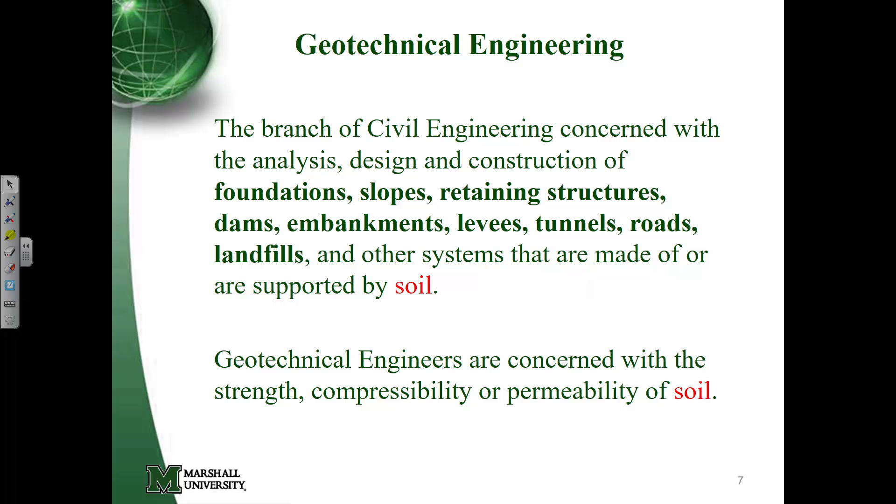I'm going to put heavy loads like tanks on the ground surface. That can cause it to settle up to 2 feet, and no one wants their tank or a building settling 2 feet. So we look at the strength, the slope stability, or how big the foundation needs to be for the building so it doesn't settle or have cracking issues and things of that nature.

And you can see the impact you made on people. That's what engineering is, it's about helping people out and solving problems. If you don't like solving problems, you need to find a different field, because the only time they call an engineer is when they have a problem. If they can figure it out themselves, they don't need you. So it's about solving problems, about accepting people's problems.

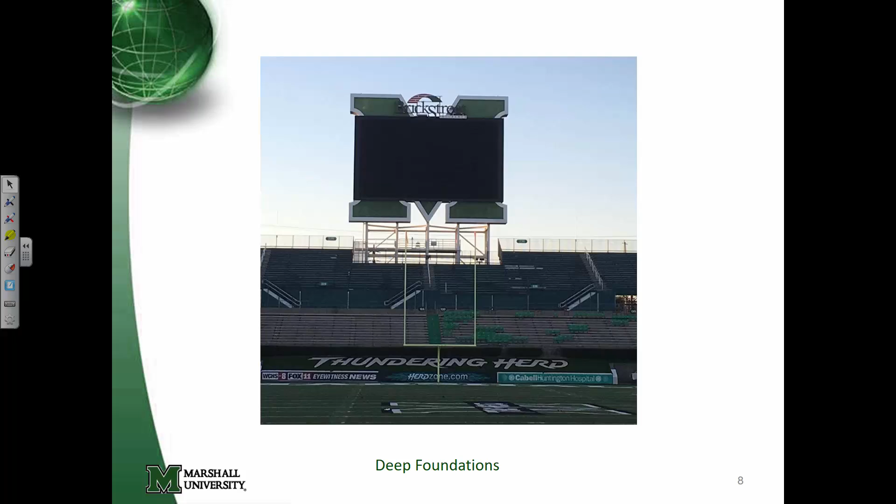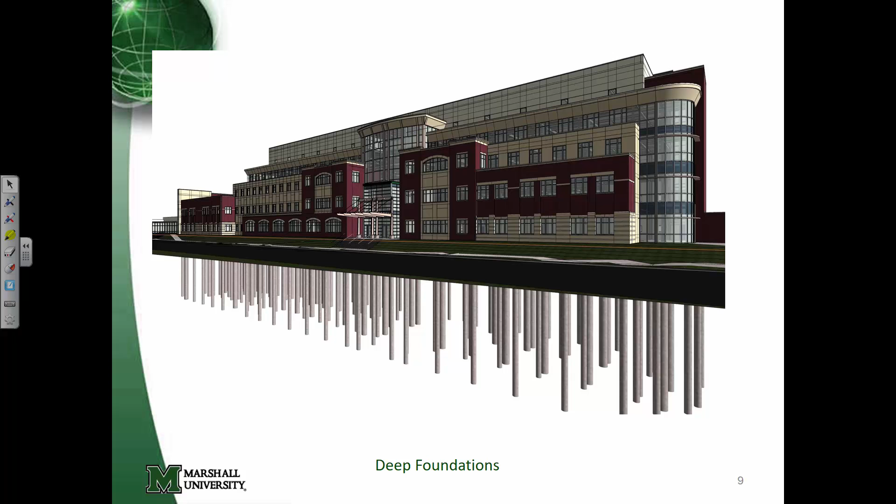If we didn't do that, that building would probably settle about 9 inches. So instead of stepping up into the building, you'd be stepping down into it. Nobody wants to do that, right? So that's a deep foundation system. That's the kind of thing geotechs design, how big and how deep those shafts need to be to support the building. Things I work on, I try to prevent these things from happening.

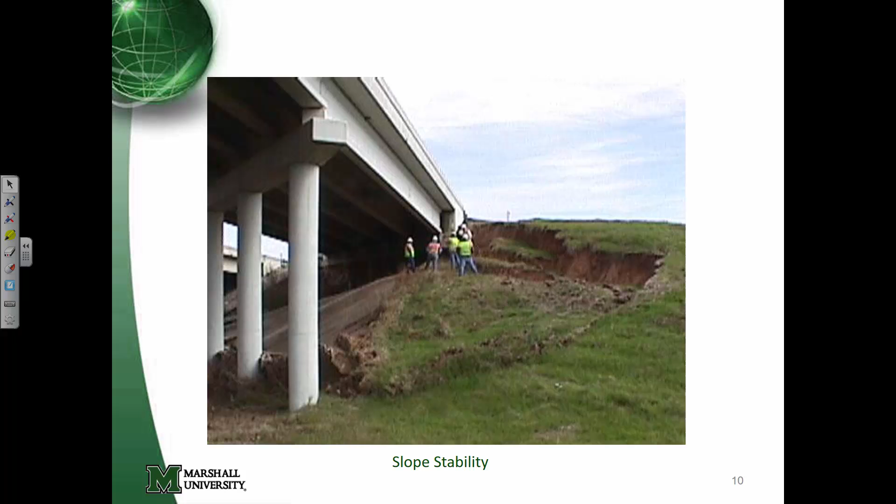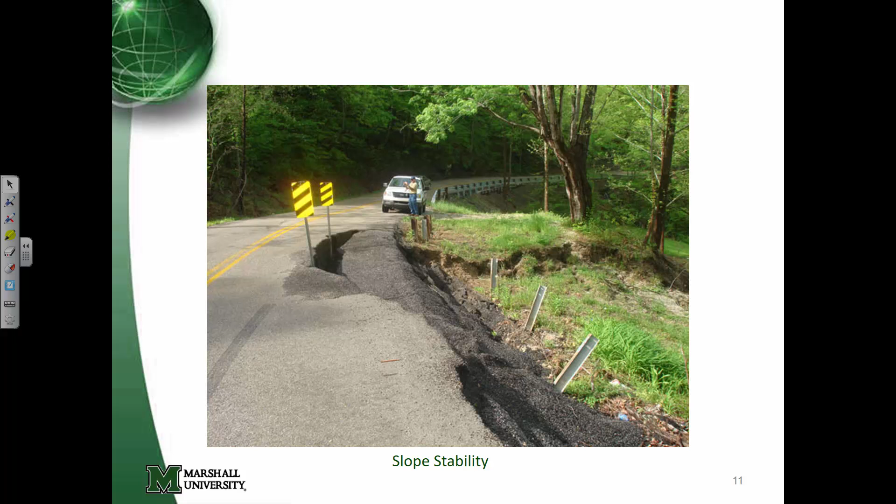I actually was supposed to have a drill rig sitting right there overnight. The drill rig was late getting there, thank heavens it was late, because $500,000 would have rolled down over the hill with the hillside. So major, of course it shuts the road down, a major inconvenience. It's somewhere around $200,000 to $250,000 to fix that when it's all said and done. So it can get expensive.

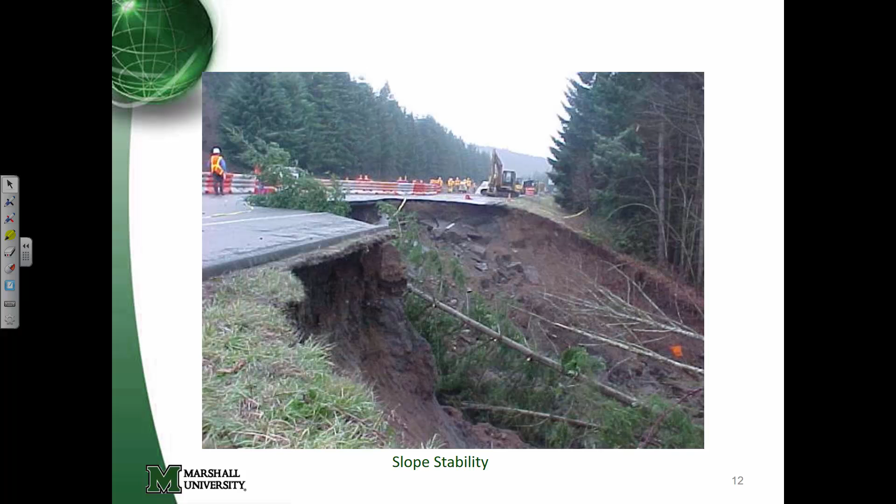I like to work on dams.

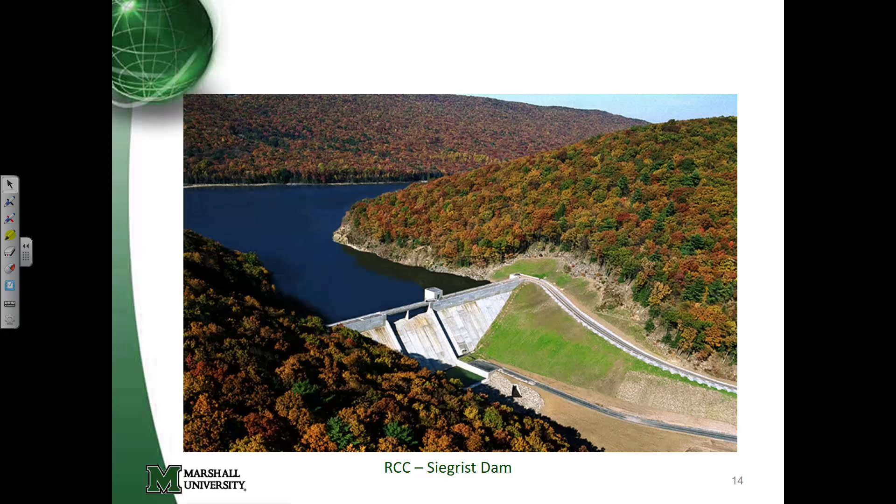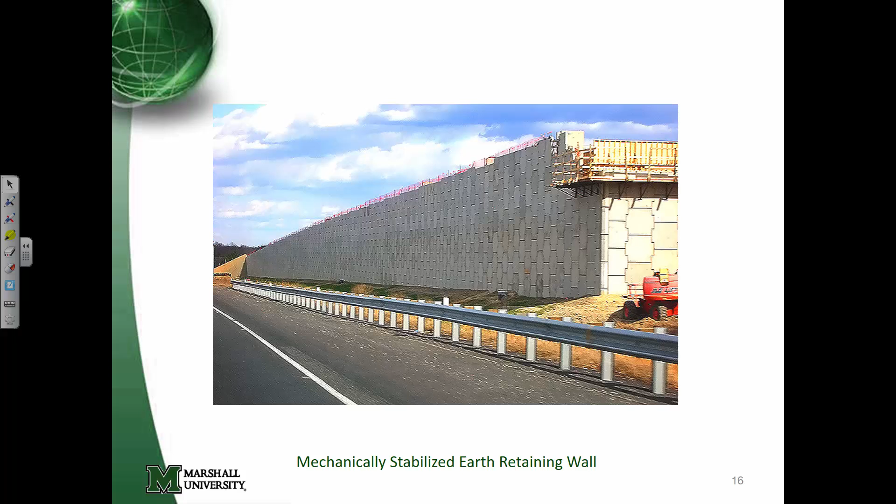That's a mechanically stabilized earth wall. There's soil inside there, and we know how to design that so that soil surface, that face, can be straight up and down and support all the loads that are on top of it.

Another example of a retaining wall, these are anchors. They go back in the ground about 100 feet, and all those anchors are required to help hold that up because that is quite a large height there.

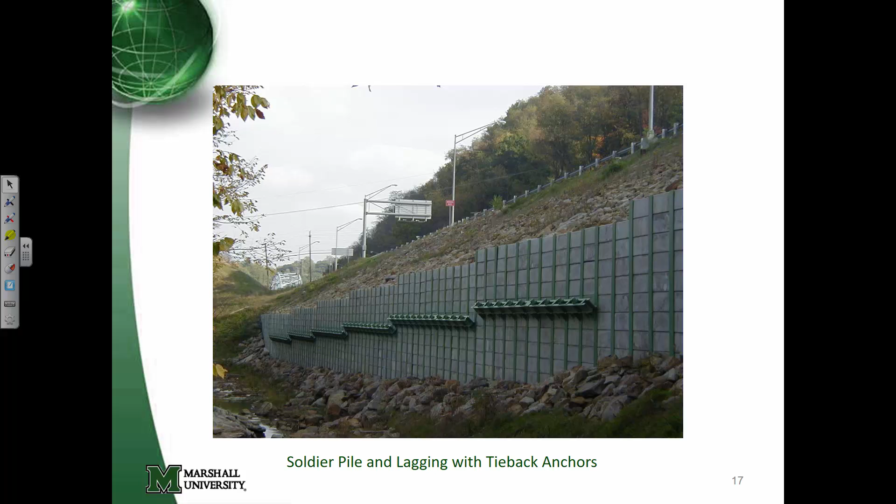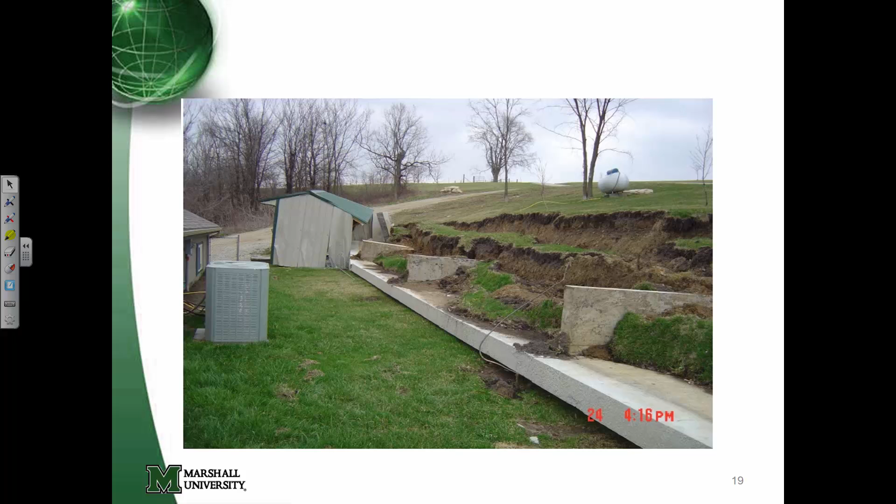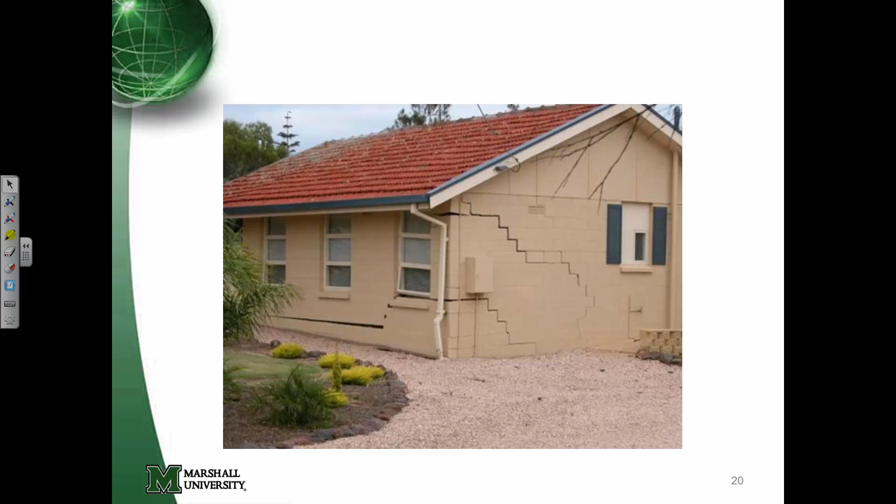Retaining walls. This is a poorly designed concrete wall that fell over in somebody's backyard. Of course, anybody starts wanting to sue each other, the contractor or the engineer, all that kind of good stuff. It's not always super catastrophic, but I still wouldn't want my house looking like that. That's the kind of stuff we can prevent, or if we don't know what we're doing, occurs.

We can have major events, liquefaction and things like that due to earthquakes. The soil underneath those buildings actually became liquefied, like quicksand. Some of them just settled straight into the ground, and a few of them laid over during the event.

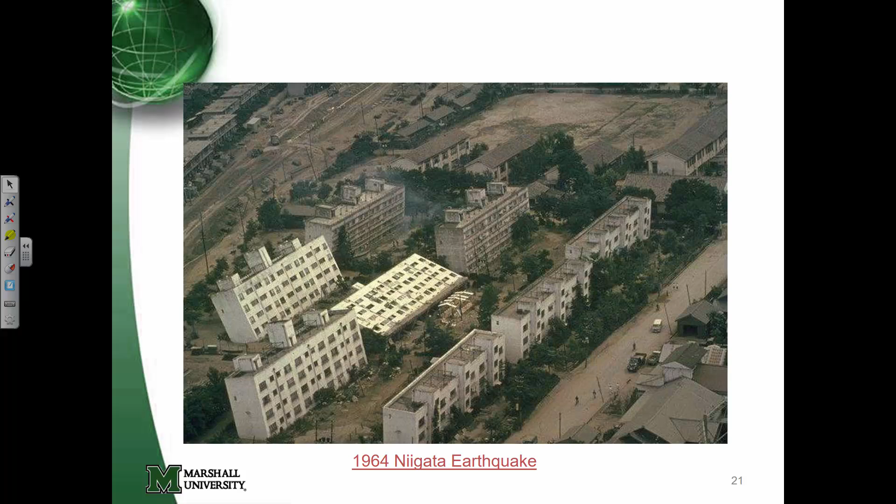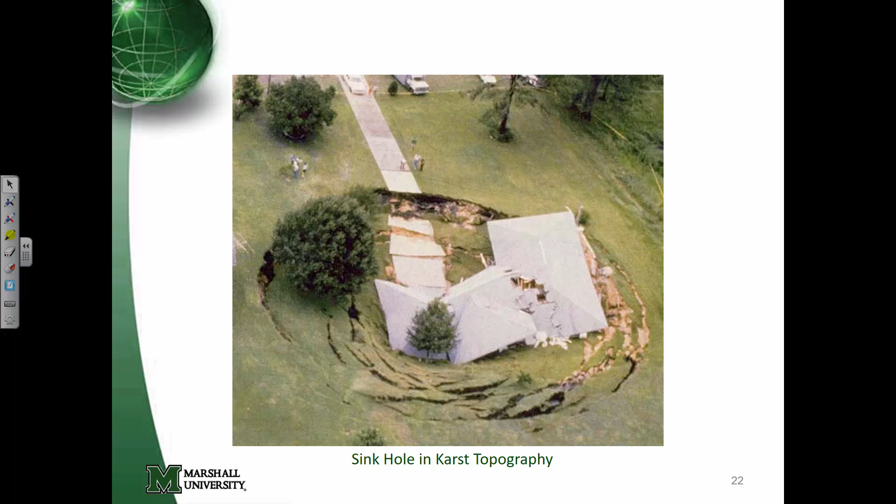Sinkholes. That's one heck of a way to come home at the end of the day, isn't it? That's a pretty good size hole. You've got to understand karst topography when you're building in it and know how to prepare a house so that doesn't happen to it.

That's Yeager, the Yeager landslide. If you looked at this, got a tape measure out, and stood down here and measured all the way up to the top, it's about 240 feet. Largest reinforced soil slope in the world. It's now the largest failure in the world. There'll never be another one built this big. The current next biggest one's 140 feet tall.

This was 240 feet tall when it was built, so they'll never build one that large again. Currently right now, all that material's gone down to about right here, and hopefully in about 2 weeks it'll all be gone.

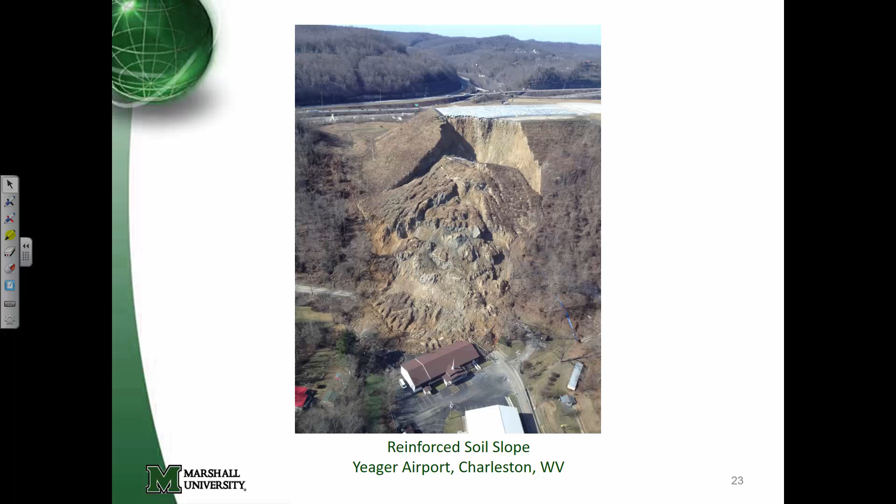More of a close-up shot. Here again, the scale is kind of hard to appreciate in these photos. That's about 150 feet right there, straight up and down. That's the end of the runway off the airport.

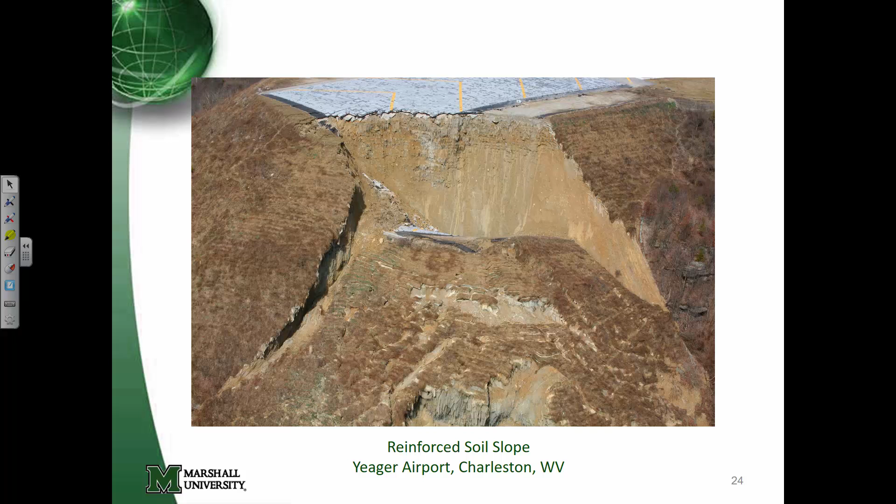Out there, I was the first person to walk on that. Six days later, out there walking, it was still moving. This material right in here, over the next year, ended up being about 150 feet down the hill because it kept failing over time and oozing down. We called it melting, essentially - it's kind of melting down the hillside.

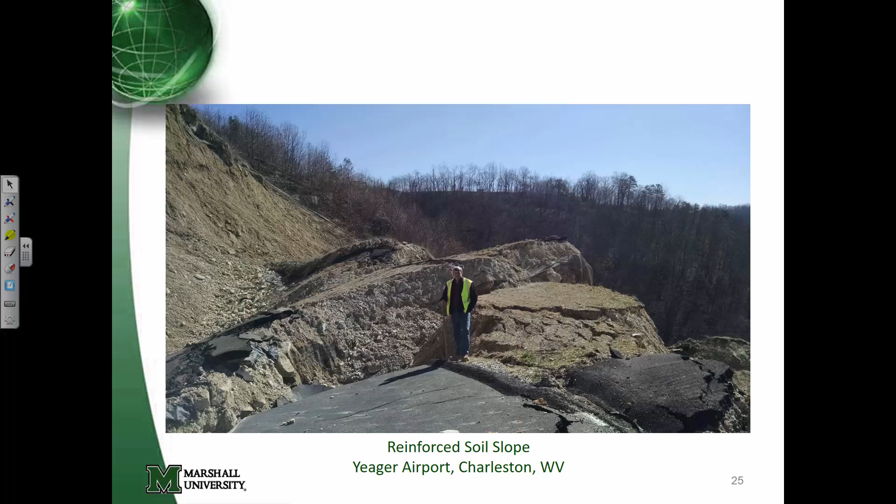So you can get involved in a lot of cool stuff in geotech, a lot of cool stuff from a failure standpoint, because when people don't know what they're doing, don't do it right, it causes problems.

So if one of your structures did fail, would you be sued? Typically, the entity that gets sued is the company you work for. Now, I'll feel guilty and bad, but you do not typically get sued personally for anything—it's the company that gets sued. If I did something very negligent, then yes, I can be personally held liable, but you've got to do something very incompetent. If you're a good engineer watching what you're doing, that won't be a problem. I don't personally know anybody that's ever been sued for negligence. I've been in this 29 years, and I don't know anybody that's been sued for negligence ever.

Good question. Anybody else? Yes, sir. On the slide with the karst topography, you mentioned it was up to geotechnical engineering to prevent that. Do you just study the soil and advise them not to build there, or is there something you can do to the house to prevent the accident?

It could be one or the other. We'll go in and drill holes in the ground. First, we have to have a knowledge of geology. There's no karst topography in our general region right here in West Virginia. Get over in Kentucky, you can get it. Of course, down south you get it a lot, in Florida and those type of environments. So we have to know the geology in the area—know, hey, I could have karst topography here.

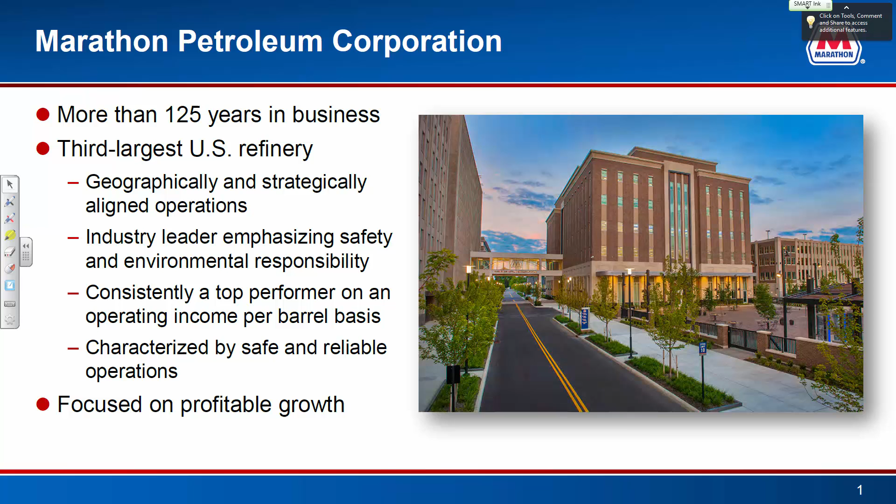We are, let's see here, a Fortune 50 company. Like I said, established in 1887, so we've been around a long time.

Largest in the Midwest. Everybody wants to know how much money do you make. Our revenues, before we take anything out for taxes and operating expenses, is $72.3 billion, which is a huge number. Our net income last year was $2.85 billion. So we made a lot of money, but we also paid $9.6 billion in taxes. As you can see, we paid 3 times the amount of taxes as we made in income. Everybody can gripe and moan and complain about gas prices, but we're not robbing you guys blind.

We have approximately 45,000, a little over, employees throughout the company. Our headquarters is in Findlay, Ohio, about 3.5 hours north and a little bit west of here.

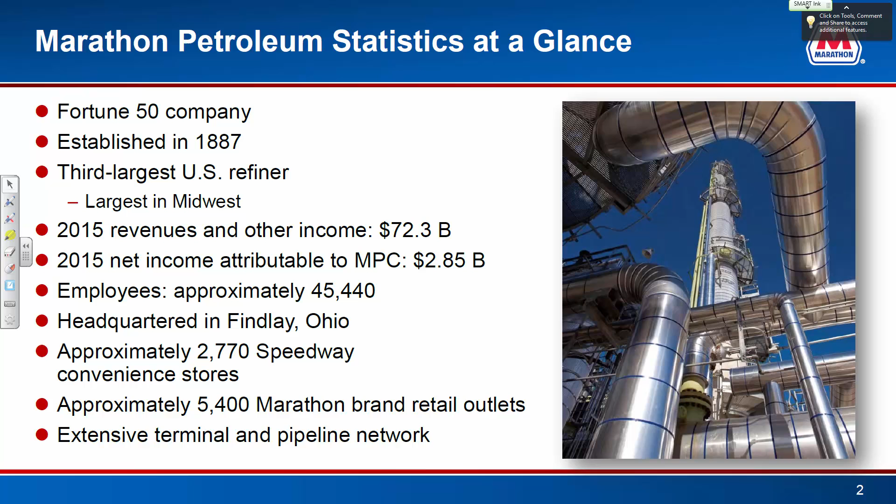2,770 Speedway locations. We just, in the past 2 years, bought the Wilco Hess franchise, adding to our station count, and there's 5,400 Marathon stations on the East Coast.

We were, at the beginning of this year, ranked as Forbes' best large employer, so that was a big honor for us. We didn't go out seeking that. I guess there were some online polls, and Forbes reaches out to all the different large corporations, does polls of its employees, and our employees nominated us, a larger portion than any other company, so we were ranked as the best large employer.

Like I said, I've been there 8 years, and it really is a good company to work for. Once the mechanical program here gets started, I've heard the rumor of the co-op program maybe getting started here too. That would be an excellent way for you guys to maybe end up working for us one day.

Another just kind of a corporate slide here: health and safety, environmental stewardship, integrity, corporate citizenship, and an inclusive culture. That's kind of the 5 pillars of our company.

This is a very busy slide, but it shows you where all the pipelines are that we own, either own or have an interest in. It's about 8,400 miles of crude and refined product pipelines, so that's a whole lot of pipeline in the ground. We have 7 refineries, and we'll talk about those here in a minute.

The closest one is right over here in Catlettsburg, where I'm based out of. We own 1 biodiesel plant in Cincinnati. I have not been there, that's the only plant I haven't been to, but it's pretty close. With the fuel efficiency standards and renewable fuel standards coming out, it just makes business sense for us to own both a biodiesel plant and have interest in several ethanol plants.

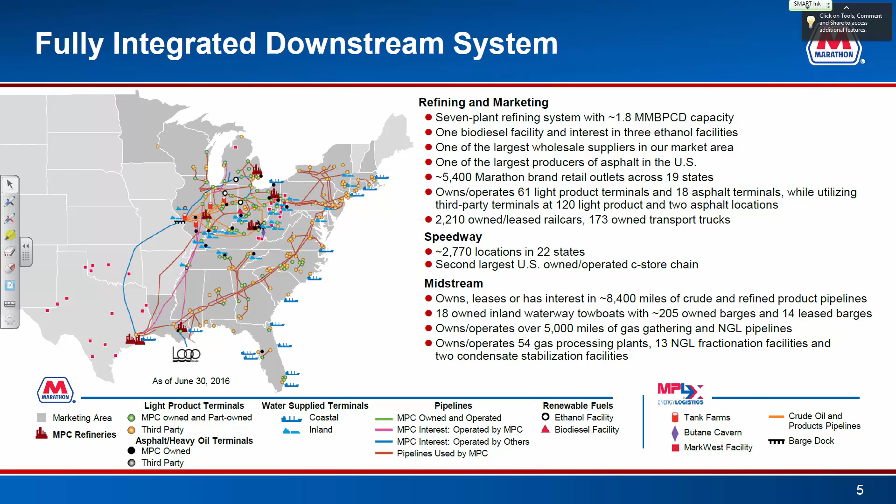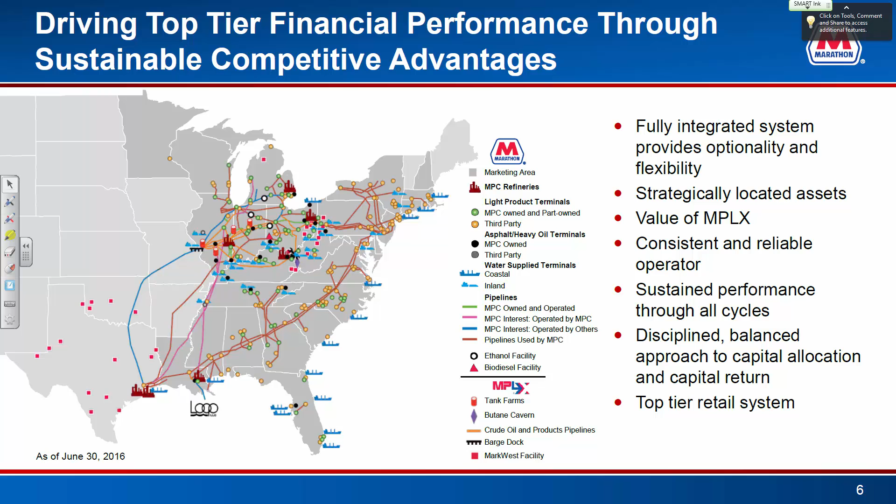Lots more information here, all basically the same. This shows our pipelines—the LOOP is down here in the Gulf. That's actually an offshore loading facility, so we can import crude from out of the country and get it into our refining network.

So what's it take? This slide basically tells you what we do with crude and what products we make. Our crude throughput is 1.7 million—M's and B's don't mean the same all the time, so it's 1.7 million barrels a day of crude going through our refining network. In a barrel of crude there's 42 gallons, so it's a bunch of gallons. We also buy 177,000 barrels a day of other feedstocks.

That gets to 1,919, and I did the math here—it doesn't quite make sense, but I have an explanation. When you add the 1,711 and the 177, you only get 1,888, but there's 31,000 barrels a day of what we call volumetric expansion. Whenever you boil the crude and crack the hydrocarbons apart, you actually get more out of a barrel of crude than what you put in.

We also purchase 412,000 barrels a day of other items off the market and resell it. At the end of the day, we have 35 billion gallons of sellable product that come through our refineries throughout the year.

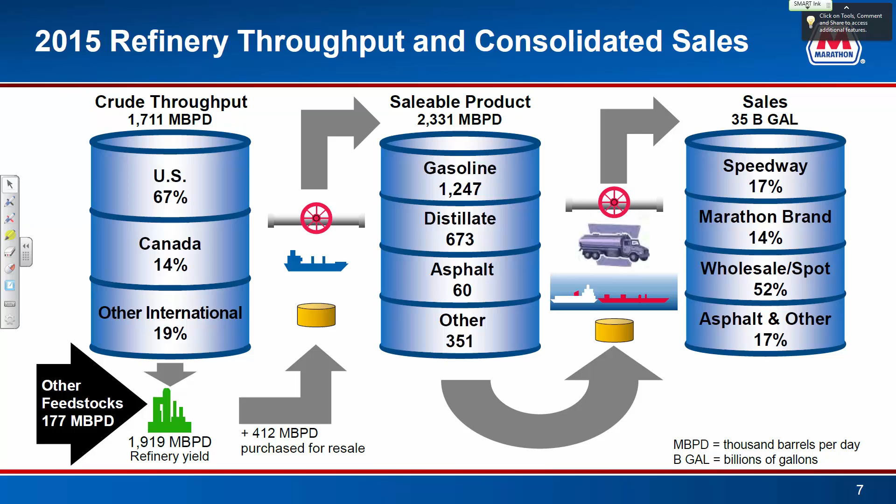Refining—like I said, we are the largest refiner east of the Mississippi. These are our 7 refinery systems. Garyville, Louisiana is kind of our mothership, the shining star—it's actually the newest refinery in the nation. Galveston Bay we purchased about 4 years ago from BP. Catlettsburg, where I work, runs 273,000 barrels a day. Then there's Robinson, Illinois, Detroit, Michigan, Canton, and Texas City.

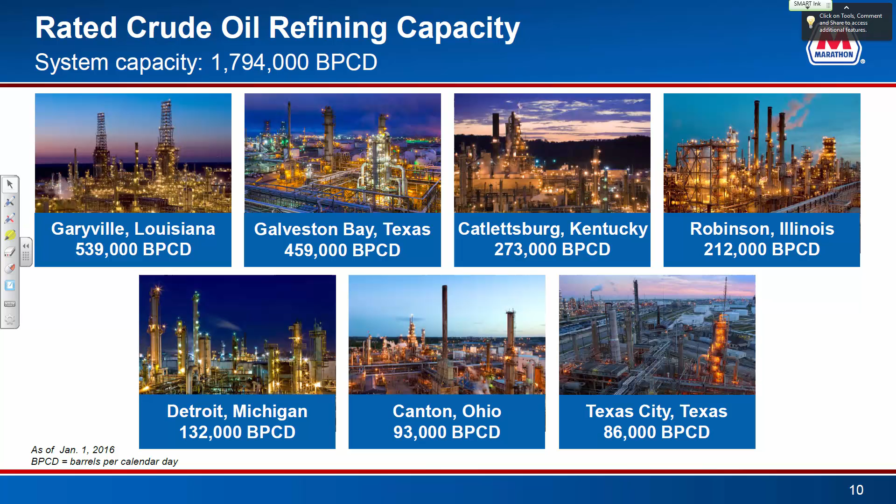We're actually undergoing a large major project at the Galveston Bay refinery. Texas City and Galveston Bay are actually right across the street from each other, so right now we're combining those two to operate them as one large refinery.

This shows the locations of where the refineries are. Catlettsburg—you can see, where's the pointer... Catlettsburg is just right across the street from us. Basically you drive west on I-64 and get to Kentucky, left and right-hand side of the road. There it is.

The only refinery I haven't been to is Detroit, and I just try to stay out of Detroit—it's a pretty rough neck of the woods.

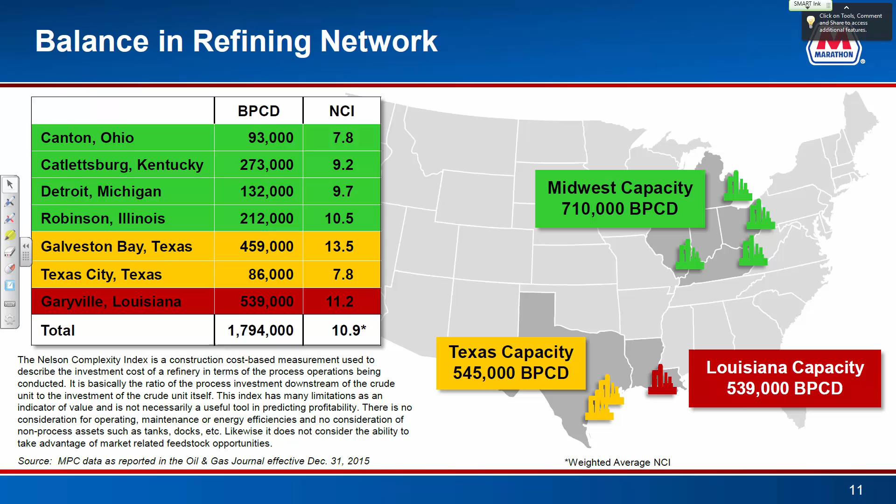Let me tell you a little bit about Catlettsburg. 273,000 barrels a day of crude oil—I didn't do the math to tell you it's 273,000 times 42, but that's how many gallons a day of crude we put through the refinery.

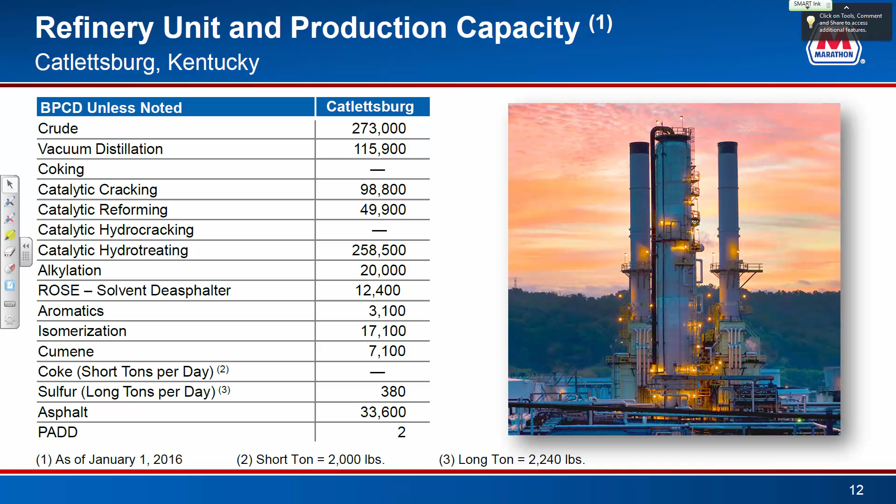It goes through the crude unit first, which is basically just a big heater. It boils it, and then in the columns it separates it out—the light stuff comes off the top, heavy stuff like pitch and asphalt comes off the bottom. Then you send it through other units like the FCC, hydrocracker, hydrotreater units, alky units—lots of these. I'm not a chemical engineer, I just work there. If I had a chemical guy available, I would have brought him with me.

And like I said, we own—there's 3 renewable fuel facilities. There's a biodiesel plant and a couple of ethanol plants that we have ownership or equity interest in.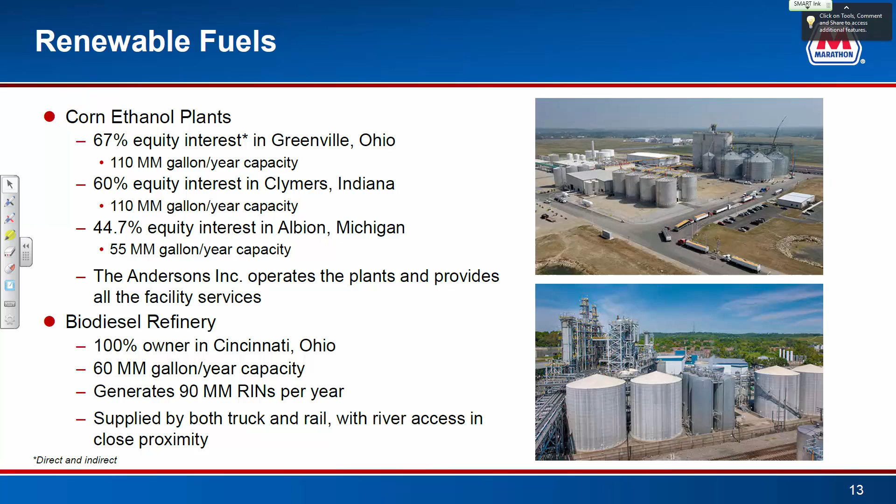To tell you how a refinery is organized, you have the tech service - those are your chemical engineers, your unit process engineers. Those are the guys that actually optimize the unit, work with operators and process control folks to say, well, today the market is we need more gasoline than diesel, or we need more jet fuel than diesel, kerosene, whatever it may be.

We have the ability to ramp up or slow down the process units to make the right fuel. On the engineering side, which is where I hired in several years ago, I hired in as an area team engineer. The refinery is broken up into several different area teams, and each area team has a mechanical, electrical, or civil, a process engineer, your operations folks, environmental. Any projects that go on - a unit revamp or a turnaround, as we call it, every 5-7 years units have to come down for maintenance - those engineers kind of run the day-to-day stuff.

Production and operations, the guys that are actually over the hourly folks that run the plant, those are always chemical engineers. They come out, usually you go from tech service to operations, process control, and then maybe plant manager is kind of the career path for the chemical engineers.

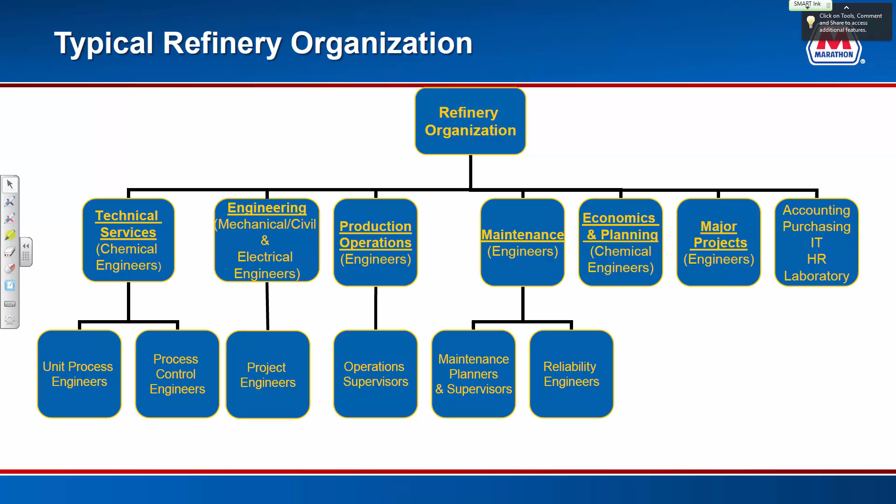One funny thing I always like to mention - not a lot of people in engineering think that you always need to do just engineering, but our HR manager is actually a civil engineer. He's a West Point graduate, and I don't know how he got the HR manager job, but he went up through the HR ranks and ended up being the HR manager here at our refinery.

This basically just talks about our major project group. It's made up of several chemical engineers, a couple mechanicals. I'm the only civil engineer in that group, and one electrical. Like I said, it's the $10 million threshold that we touch.

We actually have the largest project at the plant right now, and I'm the project manager on it. We're developing a new central control building. We currently operate the refinery out of 5 decentralized control rooms. We're actually going to bring them into one control room, kind of outside the plant, outside any blast circles. It's a safer place for the employees to be, and should improve the efficiency of the organization.

So if you're coming down westbound I-64, there's a large dirt moving operation on your right-hand side - that's mine. We're moving about 500,000 cubic yards of dirt. Got a lot of cut, fill, we'll blast some rock. For a civil guy, we don't usually get to experience that inside the plant. Ours is usually buried - we put piles in for new pieces of equipment or something like that - but this is the first big civil job that we've had in a long time.

Typical day in the life of a project manager - I spend a lot of time in meetings, a lot of time. All of our engineering detail design is done by contractors. I have engineering contractors in Houston, in Baton Rouge, Greenville, South Carolina, close, and some in Ashland, Louisville, Kentucky. So it depends on what the project is, what specialized skill set that we need. If it's a large unit revamp, there's not really any engineering firms here that can handle that, so we usually default down to the big engineering firms like Jacobs or Shaw in the Houston or Baton Rouge area, because that's where most of the refineries in the nation are.

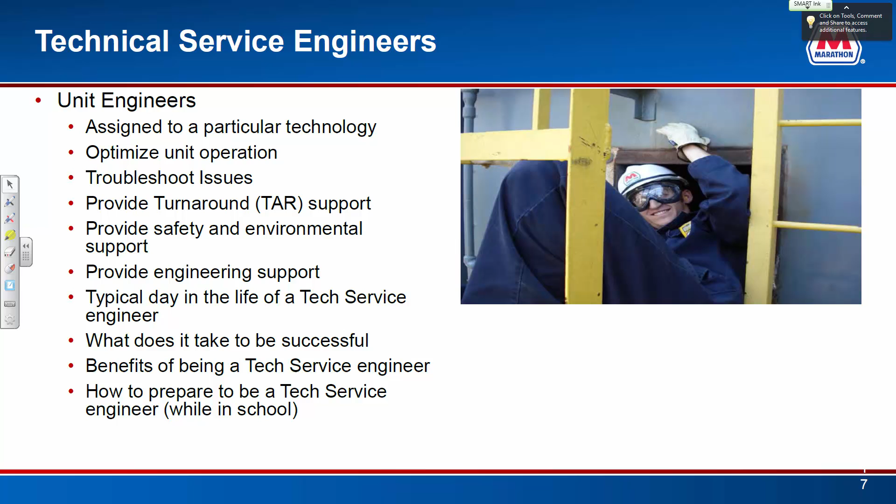Is there a potential chemical engineer in here that's going to transfer out maybe after a year or two, go to WU or something? I guess not, so we won't spend any time on that.

If I had any advice for folks going through here - the engineering econ class, I know it's not exciting, but I use that a lot to justify our projects, working with tech service engineers. Everything in a corporate environment is about what's the return, how's this going to make the shareholders happy. Basically, we want to make money for the shareholders - that's why we're in business. We're not in business to give people jobs. That's the unfortunate part of life.

But engineering econ, public speaking - I've given presentations to major projects groups, to the board of directors, to the president of the company. It doesn't matter how many times you do it, you still get nervous. So the more you can practice it coming out of college, the better you'll be.

I think project management is also important - I believe they still offer the project management class here. That's an extremely important class; it was for me, and I'd venture to guess any engineer would benefit from it. So those are the three classes I'd recommend taking. Of course your statics, dynamics, all that stuff is important too, but for a job like mine, those three classes are the ones I use the most.

I don't get down into the details - I'm not doing design work. I can count on one hand how many times I actually did load calculations when I was an area engineer, and definitely not now. The jobs are just too large to do that. So, you guys got any questions? I don't care at all to answer anything you want to know.